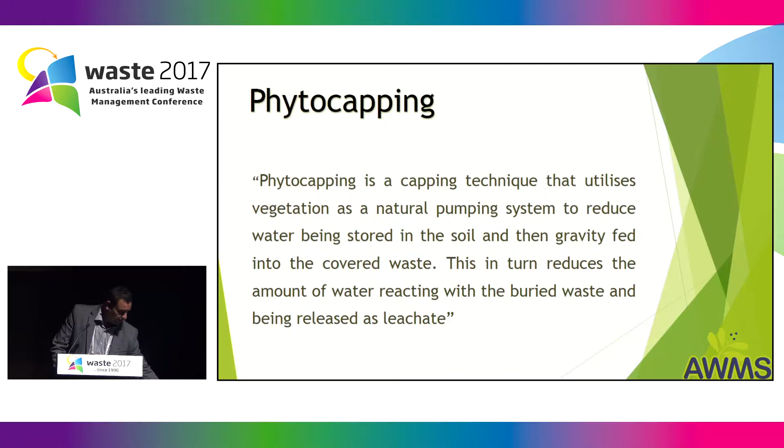So basically phytocapping, for people who don't know about it, is just growing perennial plants on the depth recommended by the state government agencies to reduce water infiltration into buried waste. It's a very simple and basic technology which works on a gross contribution of the soil and the trees. So this is the concept, and this is how the phytocapping system works.

When rain is received, part of the rain is held in the canopy of the trees, and the portion of water that actually reaches the ground surface is stored in the soil, similar to biocovers, and the rest is taken back by the different tree species in the form of transpiration. So this is the gross hydrological balance this technique works on, and this is how it removes water infiltration.

But one of the major factors: if you read the guidelines, whether Victorian or New South Wales, they don't talk about the vegetation as much as they should, other than that vegetation should be carefully selected and so on. Before going into the design stage, it's very important for every landfill operator thinking of phytocapping their landfill cells to look into the rainfall, which is the most important factor, since we are all working to reduce rainfall infiltration into buried waste.

And also look at the tree species, how much interception occurs with those species. You need specialized skills. You might want a plant physiologist or plant specialist who gives that insight on canopy interception. And we have to consider soil evaporation and transpiration before we calculate and make sure that phytocapping actually works in your region.

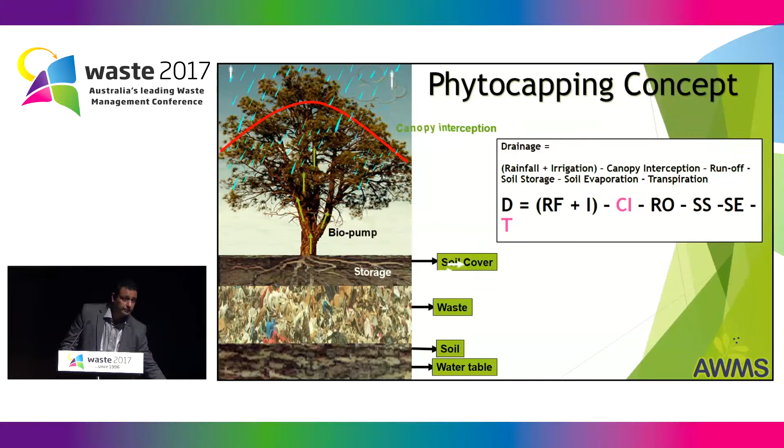So it's very important for every one of us to understand the concept, assess the pros and cons, and determine whether the system is going to work in the long term within your region. The rule of thumb is the potential evapotranspiration: if it is higher than average rainfall, then the phytocapping system will work. I know the guideline says evaporation, but it's potential evapotranspiration, not just evaporation, that needs to be factored in before we go on to the costings and the design. So make sure the potential evapotranspiration is calculated and compared against your annual rainfall.

The second aspect is the soil, another important component of phytocapping. Soil is not cheap. Once you've done your analysis, your pre-qualification modeling and testing, the second step is to get your soil source and make sure you're stockpiling your soil well in advance. It's an ongoing thing, and it can commence 2 years prior to the actual design and construction stage. In that way, phytocapping can be worthwhile and cost-effective.

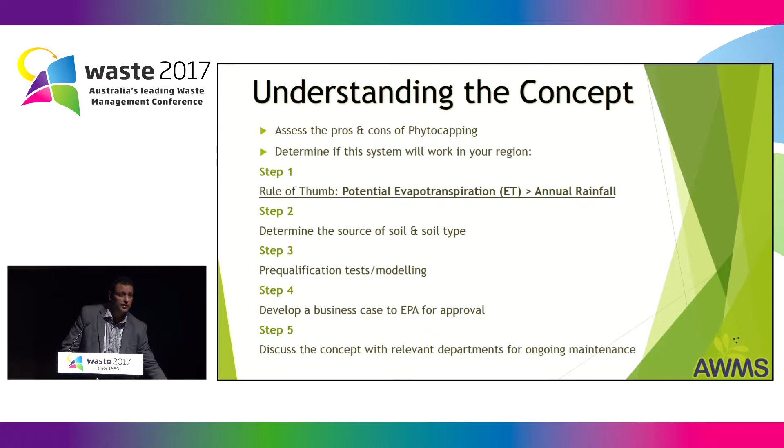On approval from the EPA, there's a pre-design checklist that is very important. One is the proposed master plan. Of course, what is the end use of this site? Is it going to be recreational? Now, two of the sites that we did in East Gippsland have walking trails, dog off-leash parks, mountain bike tracks, and observatory decks. So they are all ongoing operational costs, but it's very important that these things are discussed and incorporated in the design before it goes to the EPA.

And ascertain the depth of the interim cap, because that can create a lot of complexity, especially with the capping. And there'll be a lot of additional work that may incur a lot more cost than expected. So it's very important you understand your site, the thickness of your interim cap, and the area of the site that needs to be phytocapped.

As I said, the technology has been in place for quite some time, but obviously the concept and the process is still very much in its infant stages, where there's a lot of questions, a lot of unknowns, a lot of unforeseen circumstances that come during the process of design, construction, and execution of these phytocaps. So make sure that when you engage an auditor, basically what we have in Victoria and New South Wales, the auditors have worked on similar projects and understand the intricacies and the complexities of the project.

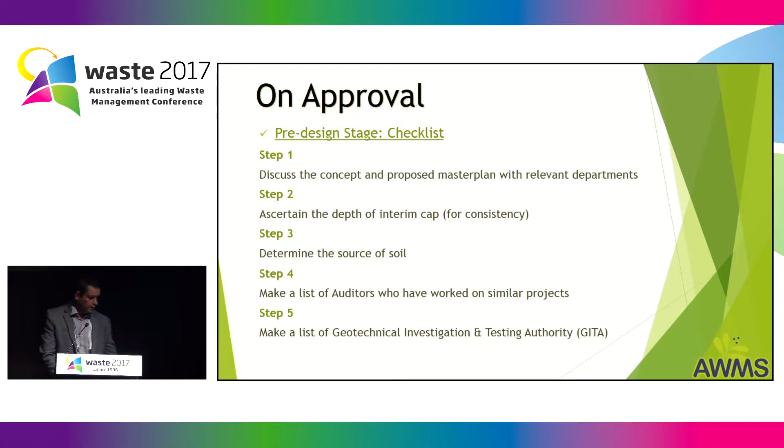At the design phase, I think it's very important that the council, or anyone who's planning to have a phytocap at a landfill site, basically goes on with their master plan and explains what they want to do and what they intend to do with their site after it's capped.

Thoroughly check the lysimeter design, because that's something that will be an ongoing testing and monitoring requirement. It's part of the EPA requirement. In New South Wales, it's up to 3 years, and then 5 and 10. In Victoria, it's up to 5 years.

But one thing that needs to be considered and borne in mind is that the trees close canopies only at the age of 2 or 3. So you're not going to get any results in the first 2 and 3 years. So that's something you might want to bring up with your EPA officers and explain it to them, and have a flexible arrangement in terms of monitoring, which could be done.

The construction quality assurance plan is the core of this project. Basically, it details each and every module and regime of the construction of the Phytocap. What needs to be done, how many tests need to be done, what sort of tests to be done. So it's very important for council, or anyone who is involved in this project, to give it a thorough read before you actually say yes to the auditor. So that's something that will govern your costing.

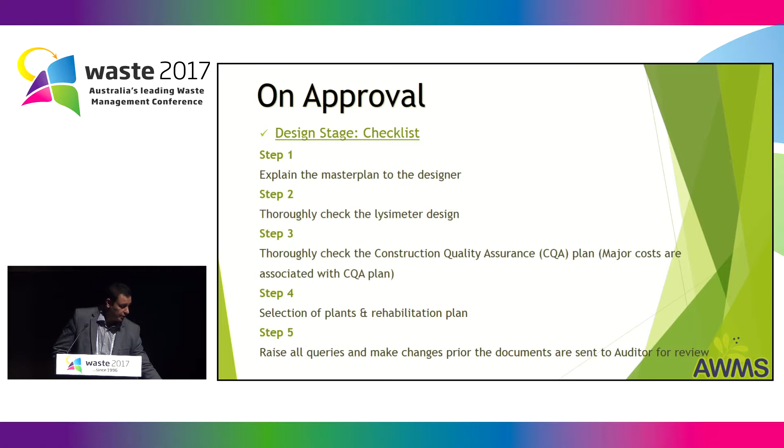So, as I said, soil is important, but there needs to be emphasis on vegetation, and I strongly emphasize that vegetation is given equal importance as soil is given in the guidelines. And selecting the right kind of tree species can reduce a lot of load, and it can improve the productivity and the performance of phytocaps.

There is some flexibility around making practical suggestions to your proposed design. If you think there are some solutions and suggestions that will reduce the overall cost of capping, make those suggestions and take them to the EPA, discuss them with your design auditor and the EPA. And it's very important that you keep the EPA informed of your changes, and give them reasoning as to why you're doing it, how you're going to do it, and how you're going to compensate for all these changes.

For example, we had our CQA plan done for one of our sites in Bairnsdale, for Bosworth Road, which is a 100,000 square meter site being constructed at the moment. And when you have a 100,000 square meter site, and the CQA plan says that you have to do all the different soil tests for every 5,000 square meters, if you put that into perspective, it's a huge amount.

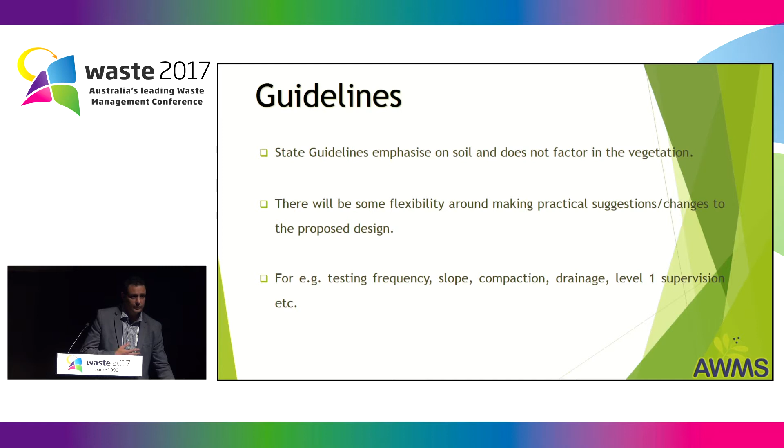And with the amount of time the GITA, the Geotechnical Investigation Testing Authority, spends on site on a daily basis, you're actually spending $1,200 to $1,500 per day for the GITA to be present on site. So those are the kind of factors that need to be considered and discussed, and it could be relaxed. These things are flexible, and I'm sure the EPA will work with you, because they have worked with us in our case, and they've been very good in terms of making minor changes prior to the design being approved.

Once we have the design approved, the next stage is obviously going for the construction tender, which is again a very interesting process. There are not many earth-moving companies or civil engineering companies who have done Phytocaps. It's a new concept for them as well. So it's good to have someone who specializes in it to give some insight earlier on.

Very importantly, make sure that you've done the modeling for the soil requirement, because once you have your soil stockpile for capping and you bring different sets of soil from different sources, it's a different ballgame, and it really gets complex, and it goes through the whole saga of getting the soil tested in the analysis, because the homogeneity is not there, and it's not complying with the initial soil that was approved by EPA.

So make sure that you have the same soil and enough soil for constructing the cap over the period of construction and execution. Obviously, as part of our Phytocaps, we've tried and used all the mulch which was processed within the Shire for rehab purpose. So we basically made 100 mil of mulch. So make sure that you have enough mulch on site, if not within the region, so that it can be carted at any time.

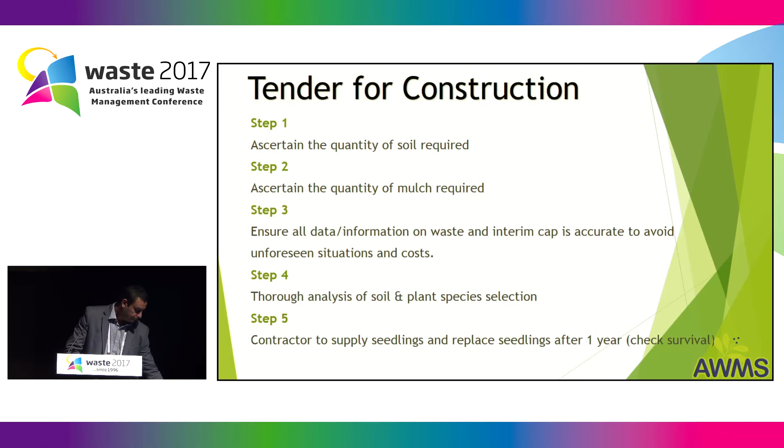And also make sure that you put in the tender for the contractor to replace any plants that have not survived 1 year later. So those are the things that you need to consider. Okay, obviously there's a few things which I've already mentioned. Just with the costing,

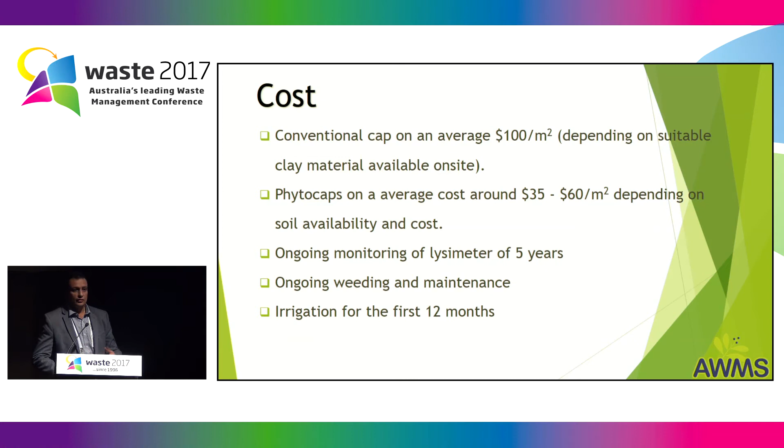from our experience, a conventional cap on average costs around $100 a square meter, as opposed to a Phytocap, which on average costs around $35 to $60, depending on where the soil comes from and how far it is. Ongoing lysimeter for 5 years, that's in Victoria, but in New South Wales it's 3 plus 5 plus 10, so that is an ongoing cost. Ongoing weeding and maintenance, and irrigation for 12 months. These are some factors that need to be costed in when you're proposing a Phytocap.

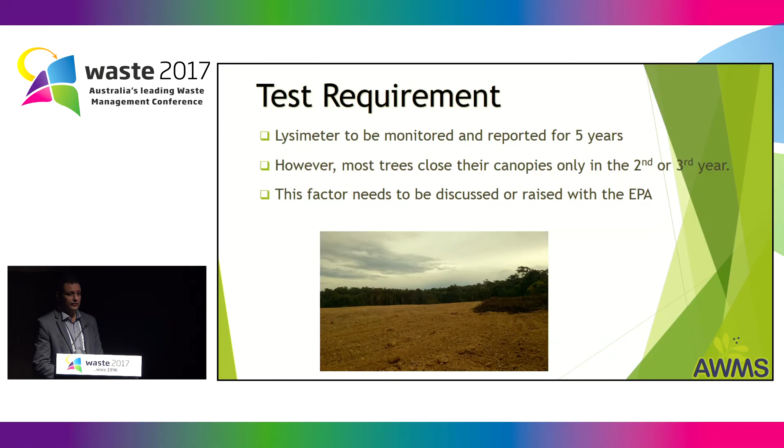Test requirements. These are some basic test requirements for Phytocaps. And in summary, basically understand the concept, get it right, involve the right people early on so that you don't have any unforeseen circumstances and complexities. Undertake a complete cost analysis prior to making a decision to Phytocap, because Phytocap is not always the cheaper option.

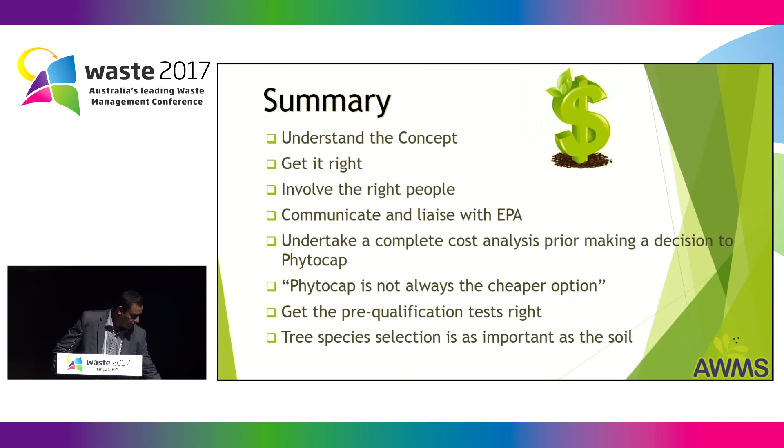Get the pre-qualification test right, get the modeling done, get the right input into the model. Include all the plant parameters like canopy interception, transpiration, etc. And of course, tree selection is important. As I said, vegetation in the system is as important as soil depth. It's a great community project. It gives a lot of value, and it creates a brand image for councils, which it has done for East Gippsland Shire, so it's been fantastic.